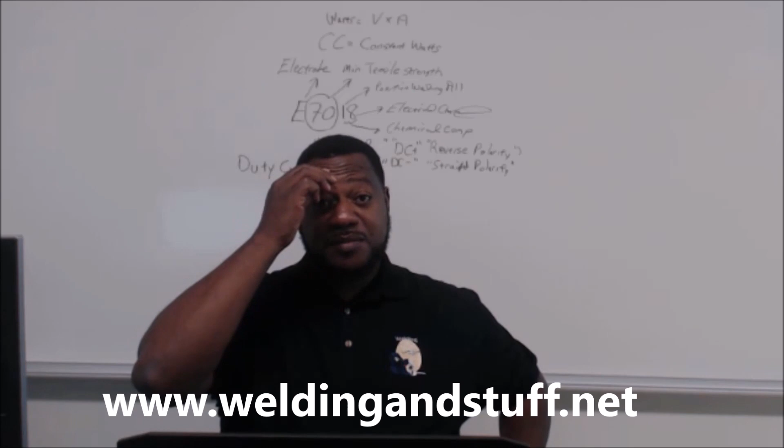But let me tell you a little bit about myself. I started welding in 1987, so I've been welding for over 30 years. I went off to college and graduated in 1992, and right after graduation I started working with this automatic welding company in 1992.

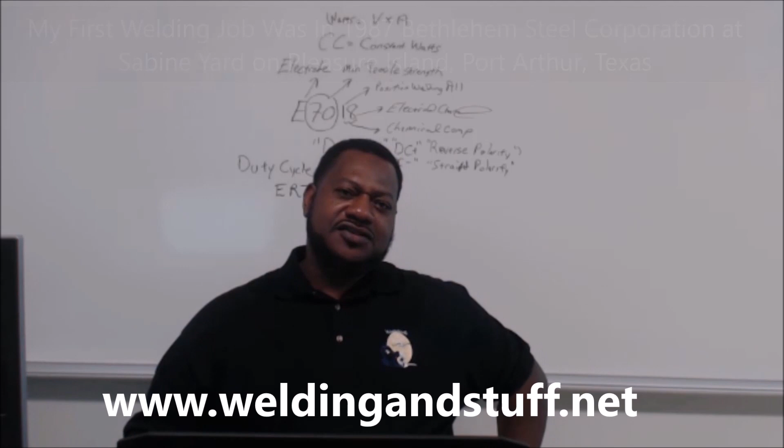Three years later, they got kind of slow. If you've ever been in the oil and gas business, you know you can go maybe 2, 3, 4 years with everything booming, then all of a sudden the wheels fall off. That's how this oil and gas field is.

They did a layoff, but I wasn't one of the ones laid off in 1995. So I said, hey, I better get my certified welding inspector certification just to have a backup. So I did go take the test.

I studied for 3 months on my own, and it's a very difficult test. I wouldn't recommend anybody doing that. I would recommend that you go take the seminar through American Welding Society. They also have ones through Real Education and more companies out there.

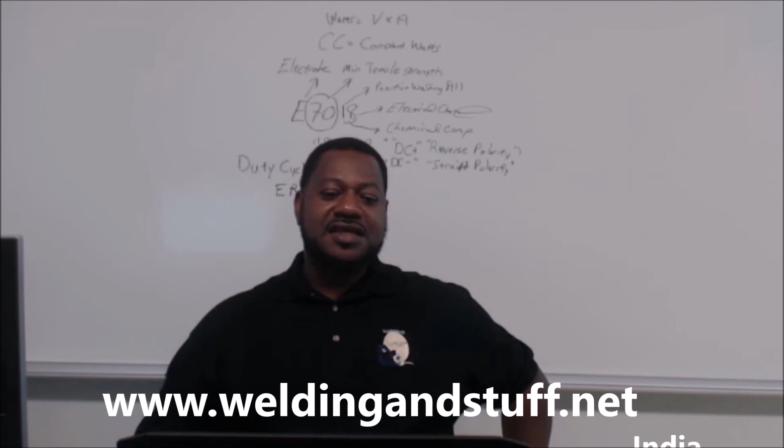Like I said, I got my CWI in 1996. I've been to a lot of places - I travel all over the world: India, Saudi Arabia, Morocco, Spain, Germany, Canada. So I had the opportunity to travel to all these places. It's great money and a good travel experience.

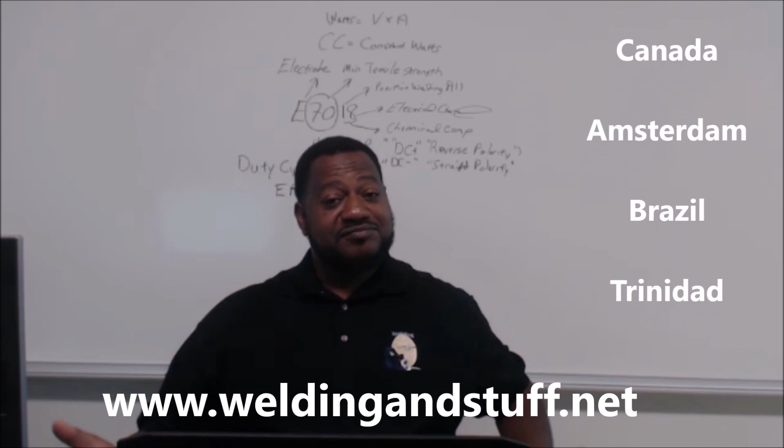And right now I also teach. I'm a certified welding educator. I've been teaching CWI courses for the last 7, 8 years. And I have a lot of students who have graduated and have good careers.

A couple of them are teaching. I have some of them that are managers at companies. I have about maybe 15 students who are doing really good as CWIs.

Like I said, if you want to get into this business, it's a good thing to have. Back in the 90s, early 90s, you would probably have 1 or 2 inspectors on the whole project. Now today you can have up to 10, 15 inspectors on a project. So this inspection business is a good thing to be into, especially as a certified welding inspector.

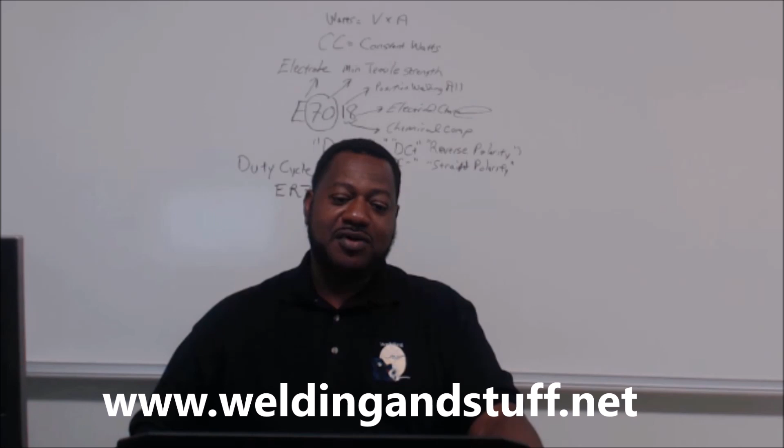And this is how it works - you've got to have a cumulative average of 72. So if you make a 70 on part A, a 72 on part B, and a 70 on part C, and you average those scores together and get a 71, even though you passed part B with a 72, you've got to take all 3 tests over again.

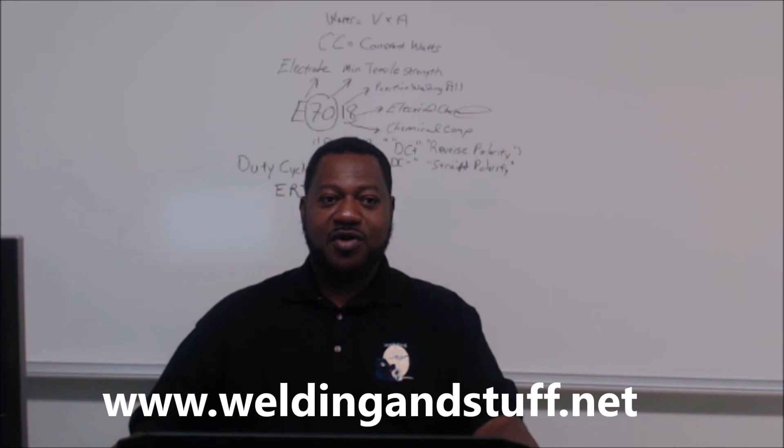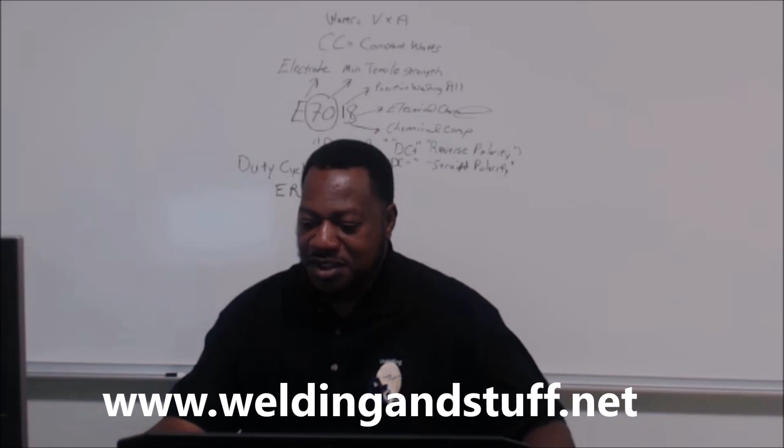So it's best to try to score high on each one of the tests just in case. If you're good with the fundamentals in part A, try to score 100, because if you score 100 on part A, then 70 on part B and 72 on part C, you just have to retake the one you failed since your average is greater than 72. So I'm going to give you an example of what we do here in my class. I won't hold you up long.

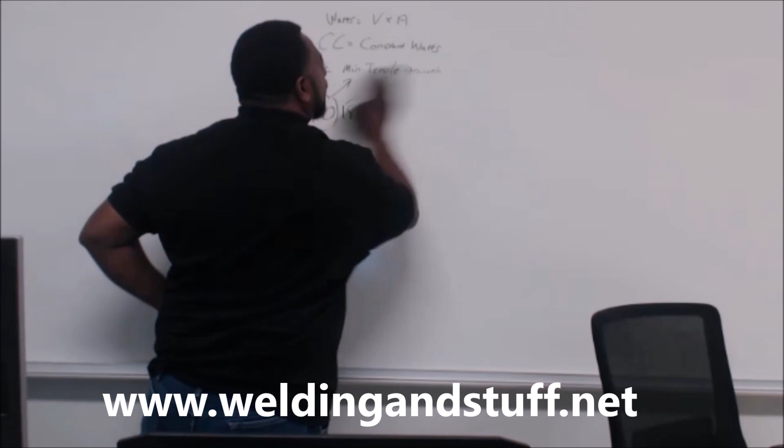What we do, we break everything down, especially on part A. So if we're doing something, say for instance, I'm telling my students we got a 70-18. We're looking at an E7018. We also call this a low hydrogen electrode. Those are questions they're going to ask. We know that the E stands for electrode, and the 70 stands for 70,000 pounds per square inch. And that 70 is the minimum.

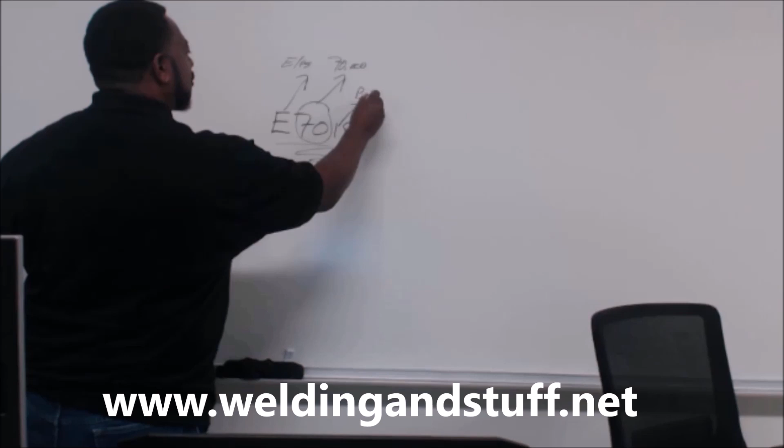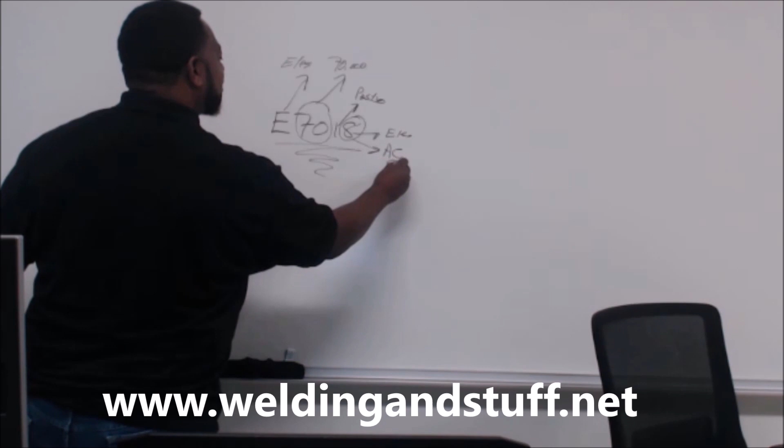Then you have the 1, which tells you the position. This 1 tells me I'm going to weld that in all positions. And this 8 is my electrical characteristics. So on the 7018, the 8 lets me know I can weld on AC or DC, reverse polarity, they call it plus polarity. So we break all that stuff down so that my students can understand it.

Look at this electrode. It's an ER70S-6. We're going to break this down right here.

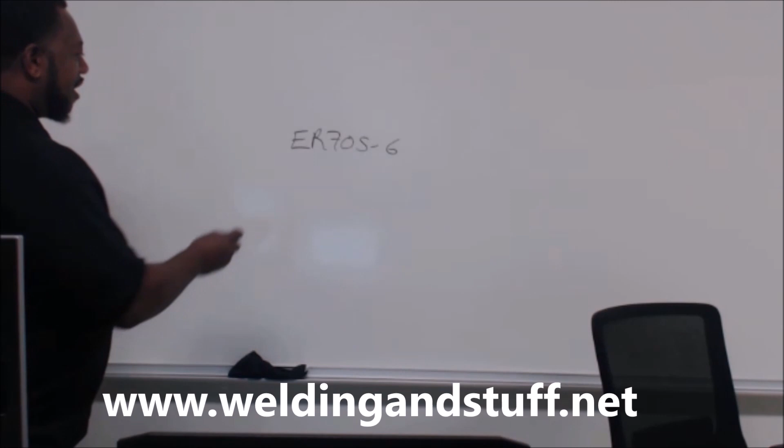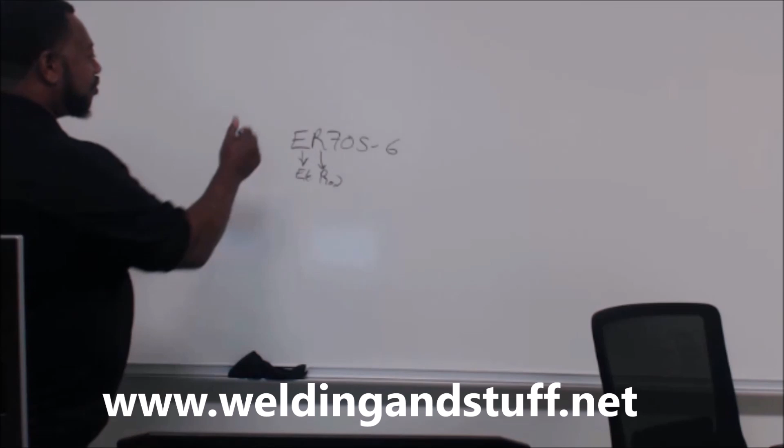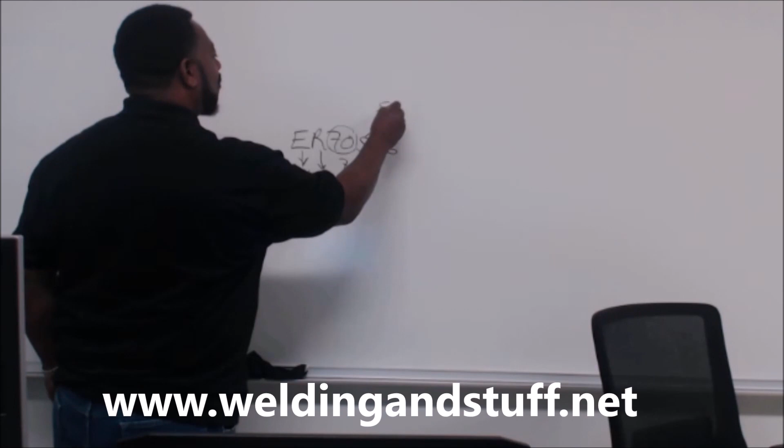We know the E stands for electrode. We know the R lets me know that's a rod. When I talk about electrodes, that lets me know I'm running electricity through this. The rod, I hold it in my hand. And this 70 is 70,000 pounds per square inch tensile strength. This S lets me know that's a solid piece of wire. The 6 is the chemical composition.

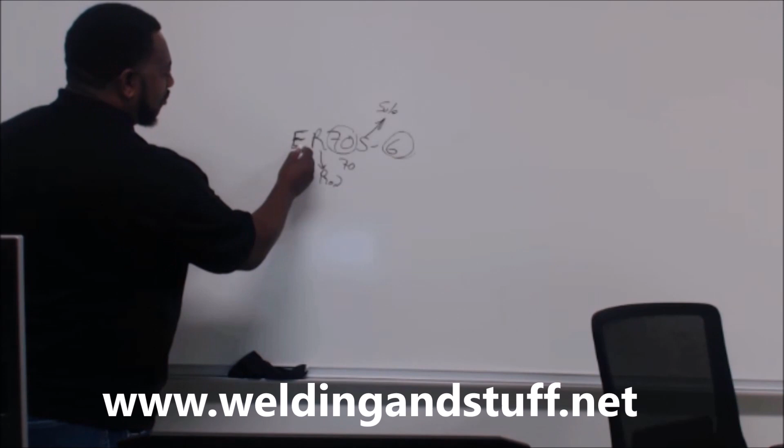So if this is a solid piece of wire, that lets me know this wire is used for MIG and TIG. For MIG, it's an electrode because you've got electricity running through it. MIG stands for metal inert gas, and that's a non-standard term. The standard term is gas metal arc welding.

So we're going to use that ER, so it can be used as an electrode or a rod. For a rod, we're going to use it with TIG. TIG stands for tungsten inert gas. That's a non-standard term. The standard term is gas tungsten arc welding.

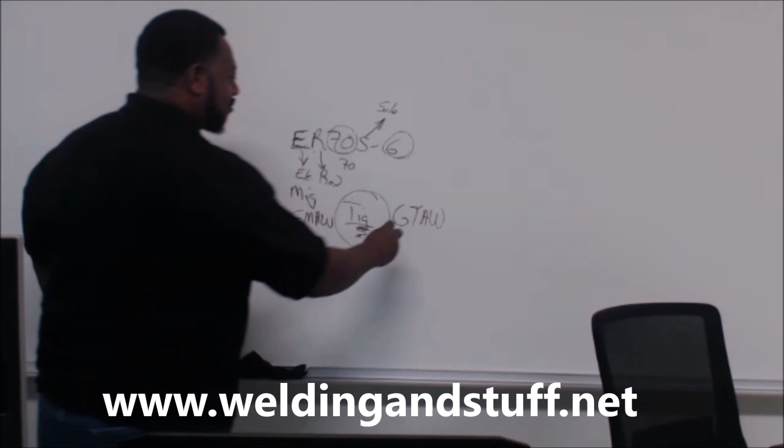In the old school, they used to call this heliarc. Because if you go back into history, you notice that they didn't discover argon. They found argon when they took air and froze it to negative 200 degrees Celsius. Once you freeze air to negative 200 degrees Celsius, it turns to a liquid. Then you heat it up. Then you find out, hey, you've got 1% argon in the air, 20.9% oxygen, and 79% nitrogen.

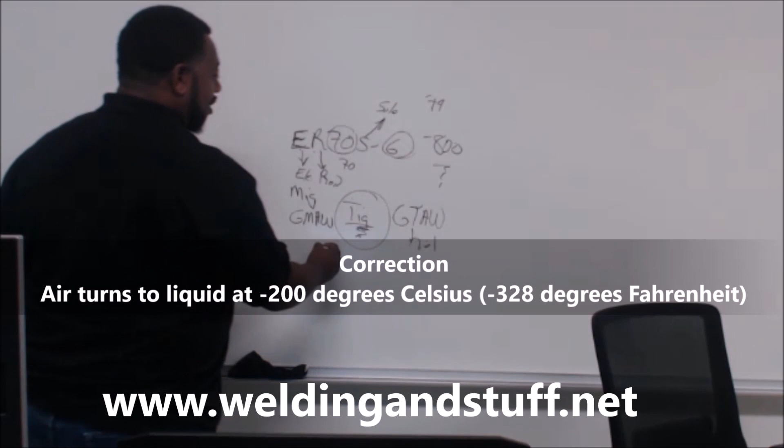So that's where they start getting into this inert gas, TIG. TIG stands for tungsten inert gas. And inert gas is argon and helium. This is the type of gas that doesn't mix with any other gases.

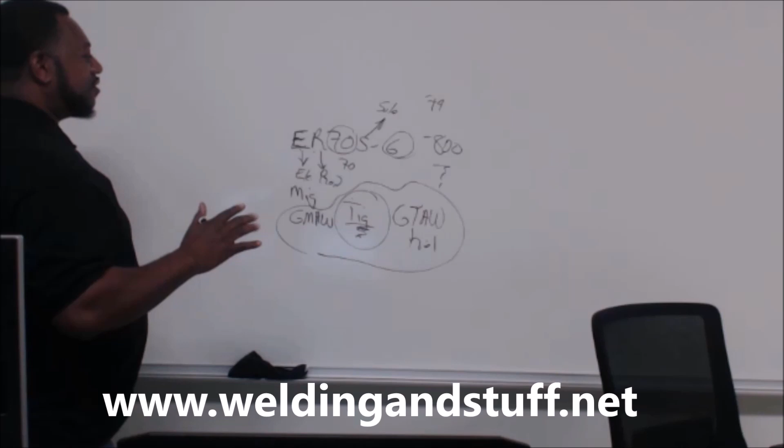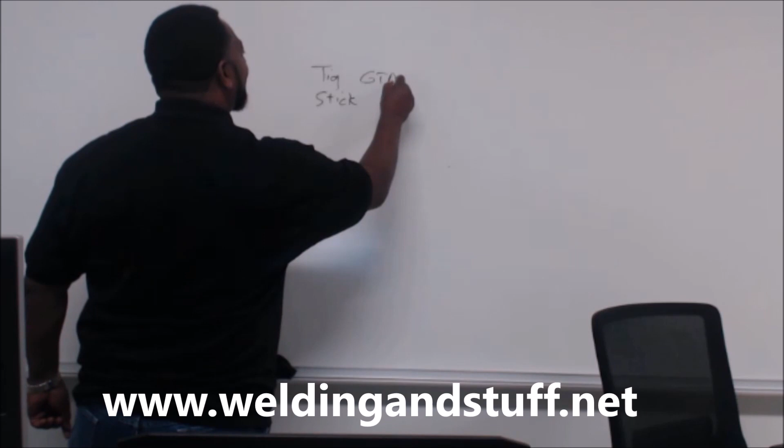So when you start dealing with TIG, here's how I teach my students. When you start dealing with TIG and stick, these are your non-standard terms. TIG is gas tungsten arc welding. Stick is shielded metal arc welding. So when you're dealing with that type of stuff, with TIG you want your electrode to be a non-consumable electrode. This is your TIG.

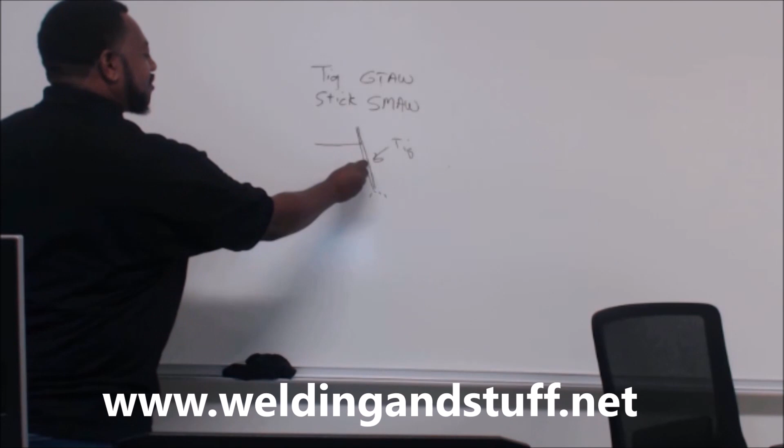And the atomic symbol for tungsten, this is a piece of tungsten, is W. That's the atomic symbol. So you don't want to consume this piece of tungsten. So you want to make this tungsten negative, and your workpiece positive. I tell my students, if you want to destroy something, make it positive. So if you start thinking positive things, or living your life positive, you get a lot of destruction. If you don't want to consume it, do negative stuff.

So we're going to deal with 1/3 heat. 1/3 of your heat is on your negative, and 2/3 is on your work. We know the arc is about 12,000 degrees Fahrenheit, and we know the tungsten melting point is 6,170 degrees. So if tungsten melts at 6,170 degrees, and this arc is 12,000 degrees Fahrenheit, 1/3 of your heat would be 4,000. So we know it's not going to consume it.

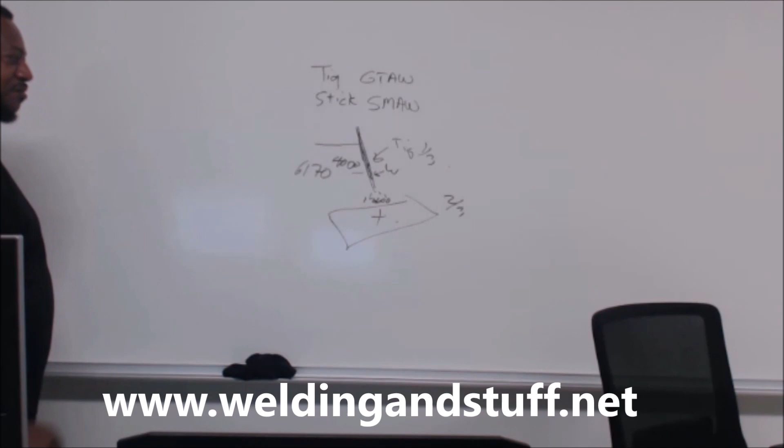So I don't want to consume that, so I make the electrode negative. If I want to make it consume, make it positive and turn your work negative. Because the electrons flow from negative to positive. Now, with 12,000, you've got 2/3 of your heat, which is 8,000. So what's going to happen to your piece of tungsten? It's going to be consumed.

It's going to be consumed. So in stick rod with an E7018, we want to consume this. So if you want to consume a 7018, you make your electrode positive and you work negative.

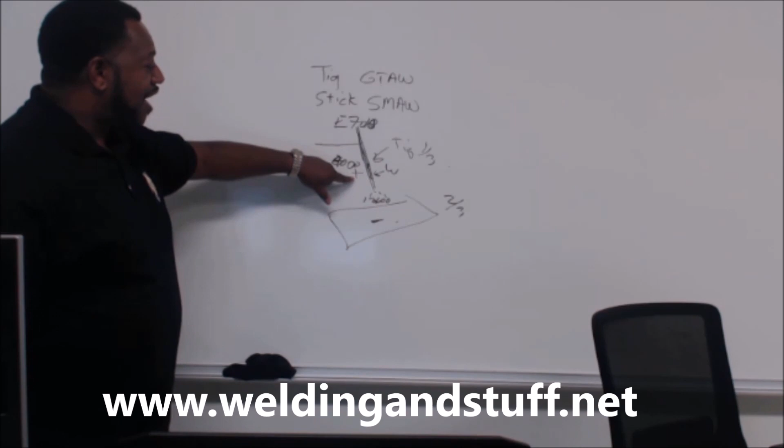Now we know the melting point of regular steel is 2,795 degrees, about 3,000. Let's say 3,000 degrees, I want to consume it. You can consume it if you had it negative, but we're going to make it positive. So we know that 8,000 degrees Fahrenheit is going to consume this electrode, and then your 4,000 is going to be down here. So anytime you want to consume something, make it positive.

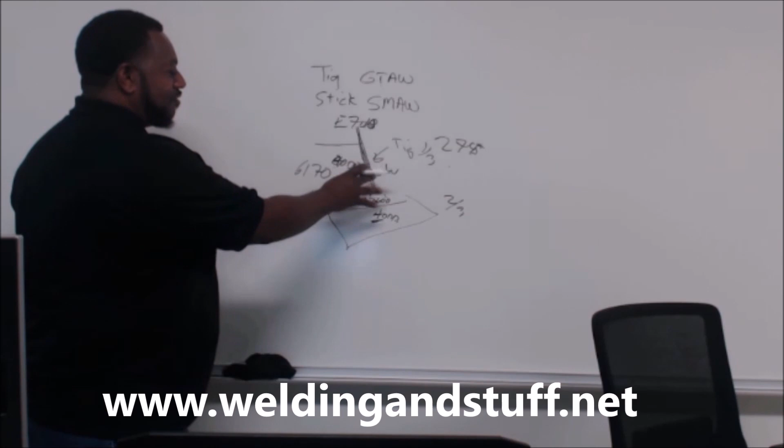If you're in life doing something good, you want people to hate on you, do some positive stuff. You're going to have a lot of people want to destroy you.

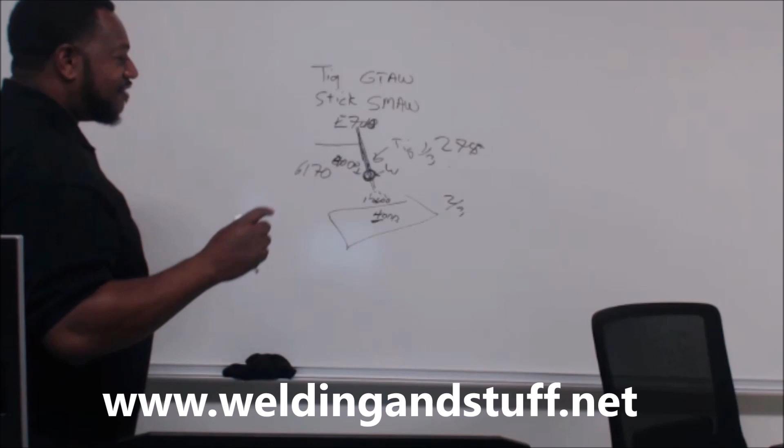So in my class, I teach anything you want to destroy, make it positive. I want to destroy this electrode an E7018, I want to consume it. So I'm going to make that direct current electrode positive, and that will consume it. If I was dealing with TIG, I don't want to consume it, so I'm going to make it negative.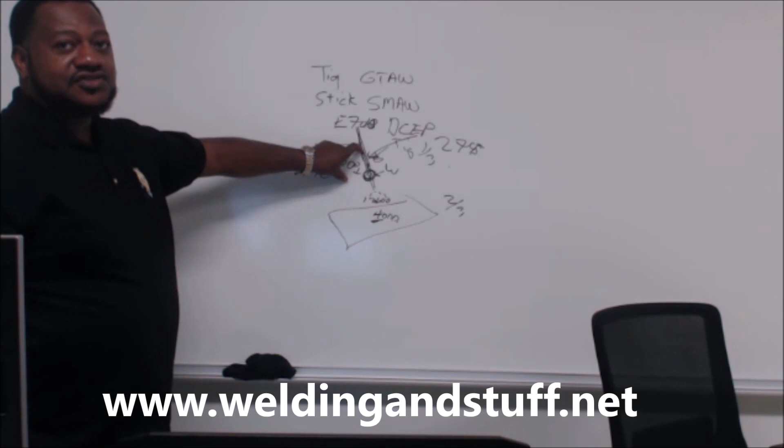So you see how that works? When you're dealing with TIG and stick, you're dealing with constant current. Constant current equals constant wattage. Wattage equals volts times amps.

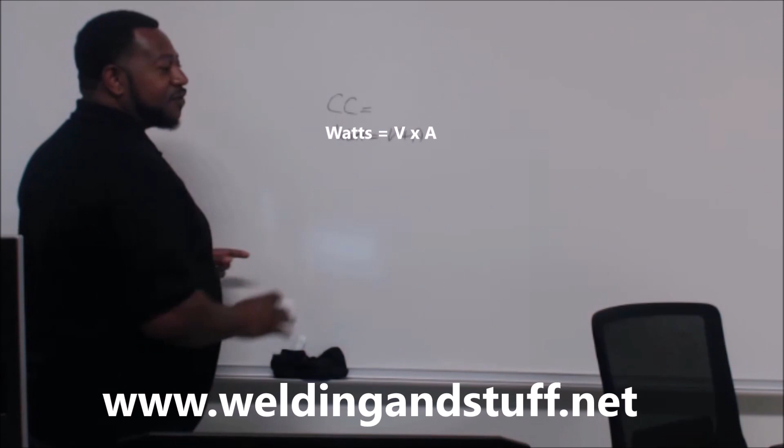So when you're dealing with TIG and stick, say for instance you weld stick, we got a 6010, and we putting a root bead in. I'll put a land, okay. Say for instance you got a 6010, E6010.

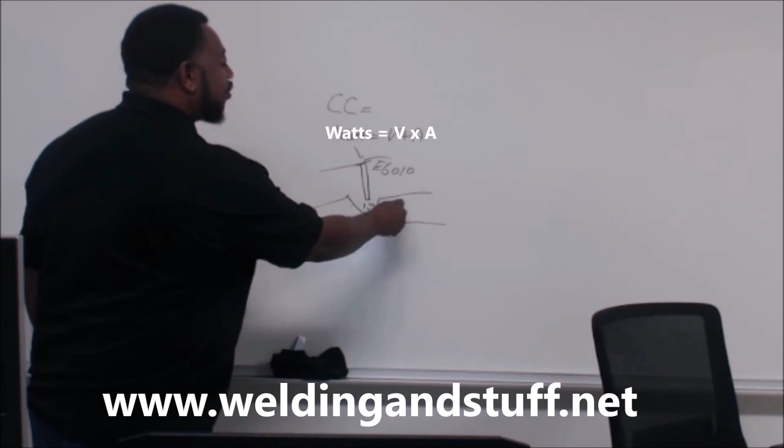If you want to get more penetration, what you want to do is bring your rod closer. The closer you bring it, the more amperage you get. So if your amperage increases, what happens to your voltage? Your voltage decreases because it's trying to keep a constant wattage.

So if I bring my electrode up, my voltage is going to go up, which is going to bring my temperature up, but my amperage is going to go down. So instead of getting penetration, you're going to get some suck back because you're bringing your rod up. That's the good thing about welding

and becoming a welding inspector. If you do 10 years in the welding field, then you come into your class, you will understand a lot of this CWI stuff I'm talking about. So it's good to know how to weld, but it's even better when you understand what you're doing.

So if I want more penetration, I bring my rod closer, I get more amperage, but my voltage goes down because I'm trying to keep a constant wattage. That's how I teach this class. It's just simple stuff right here.

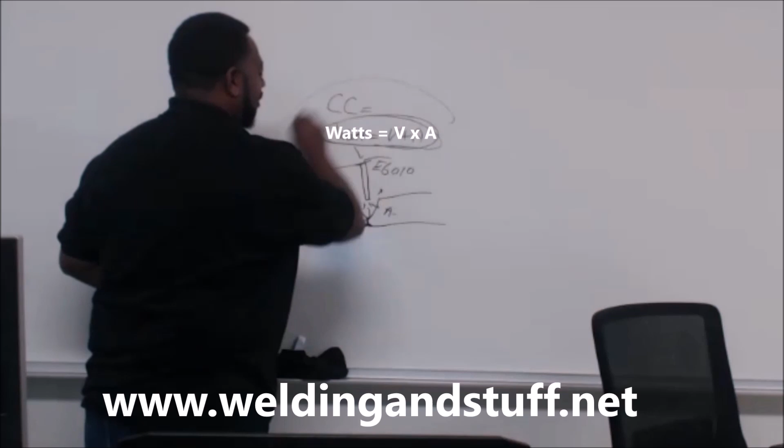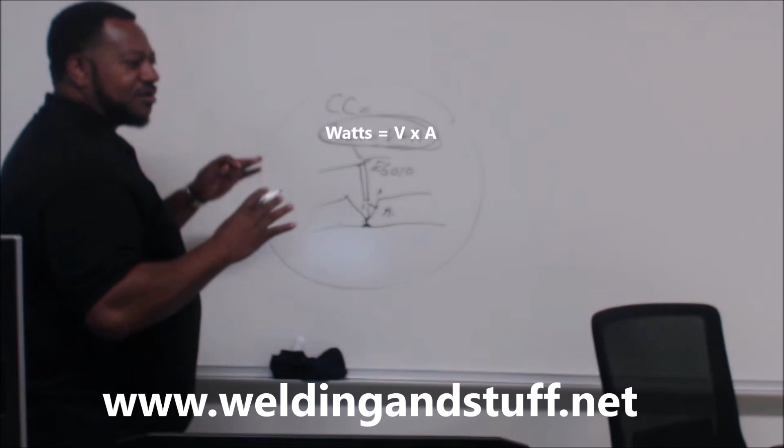We're talking about just an electrode, that's just a little bit of part A. If you understand just this part we just discussed, you probably make a 20-25 on part A. But in part A we get into the metallurgy, blueprint reading, fillet welds, the position of your welds, your 1G, 2G, 5G, 6G. You got to know your 6GR. So it's a lot of stuff.

You got to know the metallurgy, annealing, quenching, and tempering. What's following quenching is tempering. So you got to know all of that different stuff. I know I'm putting a lot of information out there, but trying to cram everything in 2 weeks is a lot of information.

In the classes we teach here at the college, it's like a 3-month class. So we take our time, we understand, we break everything down and watch videos. Now some of the students haven't ever welded before, which is fine, they take it in class because it's part of the curriculum. So this is what we do.